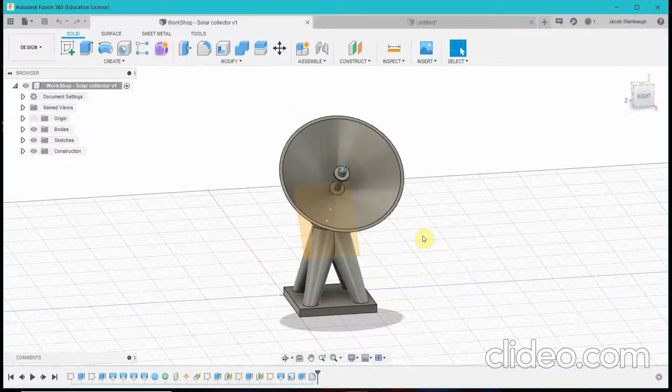Today I will be recreating the 3D solar collector that we made during GM3, as the second and final round of the workshops we held. Just to give you a preview, this is what the final product should look like—a little prototype solar collector that we'll be using for the autoclave project. Let's get started.

Once you open up Fusion 360, it should look like this, just a plain 2D dimension with no sketches. The first thing we want to build is the base of the solar collector, so we hit Sketch—you can click any plane, it doesn't really matter. I'm going to click this plane and then hit 2-point rectangle to begin.

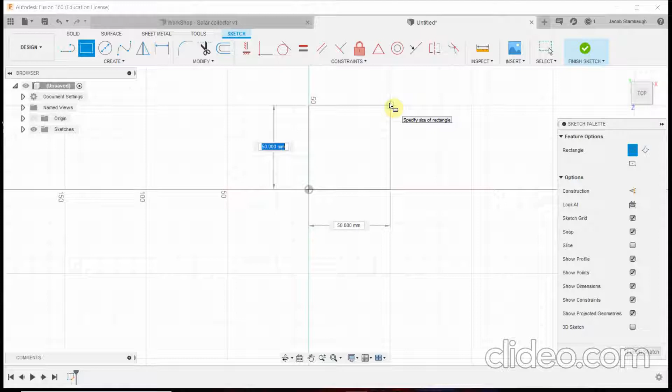You always want to start at the origin, since that's a fixed, locked place in these 2D dimensions. So the first rectangle is going to be here, and I'll draw my second point here to make more of a square than a rectangle. Once again, the exact dimensions don't matter, as long as you get something close to what I'm drawing—the actual numbers don't matter.

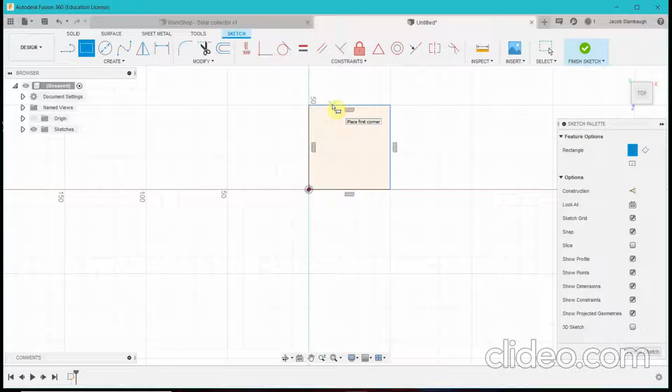One important thing to note is that after you draw the first rectangle, the tool is still selected. If you don't know this, trying to continue on can be annoying, because for the next step, if you want to click a line, it won't let you since it's still trying to draw more rectangles. To unselect the tool, you can always hit Escape, and now the tool is no longer selected.

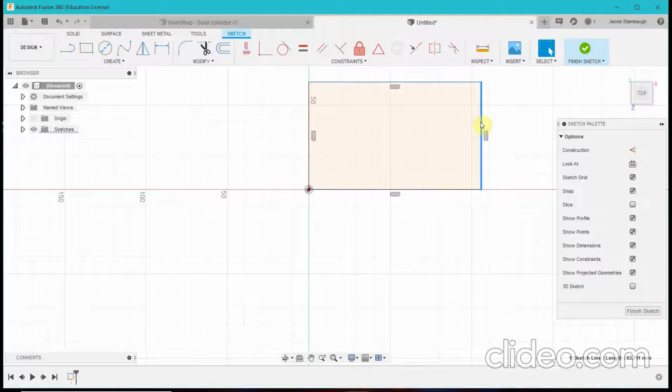Now we're going to fully define the sketch. Fully defining a sketch means that when you try to click and drag it from any end, it won't move. In this case, it's not fully defined because it moves. One easy way to tell if your sketch is fully defined is if it has blue or black lines—if I try to click and drag the black lines, they won't move.

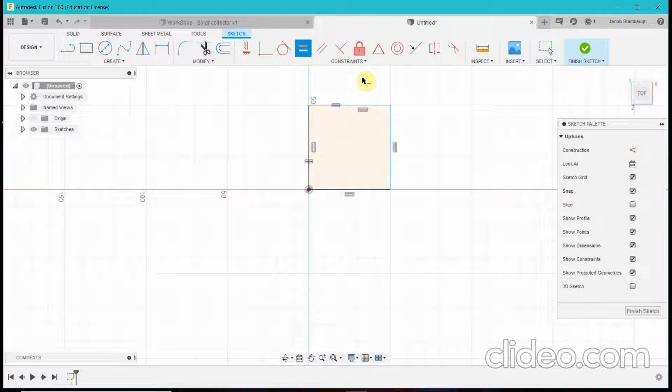Typically the easiest way to fully define sketches is either to set specific lengths to certain numbers, or to use constraints. For this case, we'll use a combination of both. First, we use this equal constraint to set these two sides of the square equal to each other, and you can see it automatically changed to make them equal. Once again, hit Escape to get rid of the equal tool.

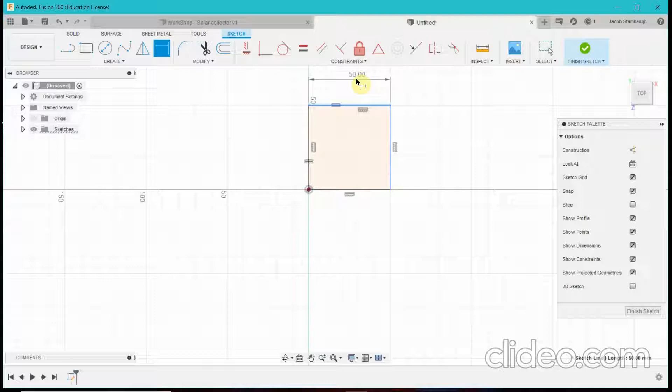Now, to fully define it, we right click one of the edges and hit Sketch Dimension—you can do this with any of the sides, and you can always use sketch dimensions for any kind of dimension, angle, or point from a line. I'll do the sketch dimension of one side, and it'll ask what I want to define it as—in this case 50, which is what we want this side to equal. Now you can see the lines turn black from blue, so when I try to stretch it out, it won't let me.

Our base is done, so we hit Finish Sketch, and now you should have just a square. We want to make this square 3D, and the best tool for this is not Press Pull. Press Pull is another tool you can use, but I try to stay away from it because it doesn't have as many features as Extrude—Press Pull only lets you create a basic 3D shape, while Extrude has a lot more tools and functions, so it's typically more useful to go with Extrude.

So you're going to extrude it some height. You can manually extrude it like I'm doing here, or you can type it in over here—in this case I want it to be not 50, but 5. My Fusion 360 has been set to millimeters; yours will probably be in inches. It doesn't really matter since we're just designing something, but as you can tell, millimeters would be really small, so this isn't very ideal.

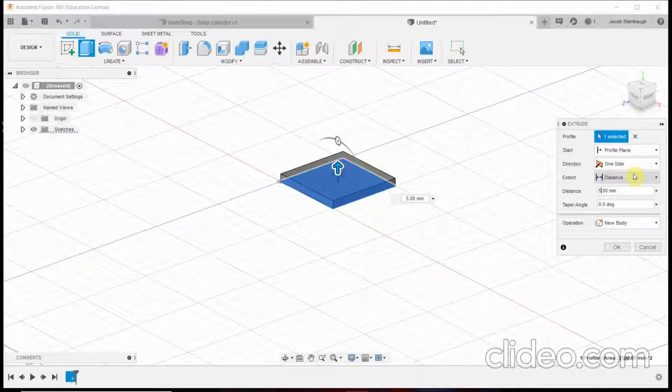Everything else looks fine—we want to start at the profile where we clicked, we only want to go one side, we want to manually set the extrude distance, and we want a new body. So we hit OK, and now you can see we have our base here.

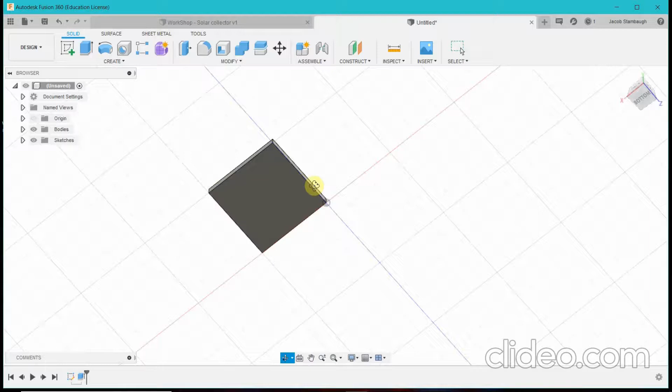If you're wondering how I'm panning around this object, I'd suggest using a mouse whenever you're CADing, it just makes things a lot simpler. If you scroll the pinwheel, it zooms in and out. If you press the pinwheel down, it allows you to drag around. And if you hit shift and the pinwheel, it allows you to pan around like this, so you can see any face or side you want.

If you don't have a mouse and still want to do these things, you can always left click this square and rotate it around. I typically use this to orient myself because it has these useful arrows and stuff like that. But moving forward, another really useful tool is clicking these little folders here.

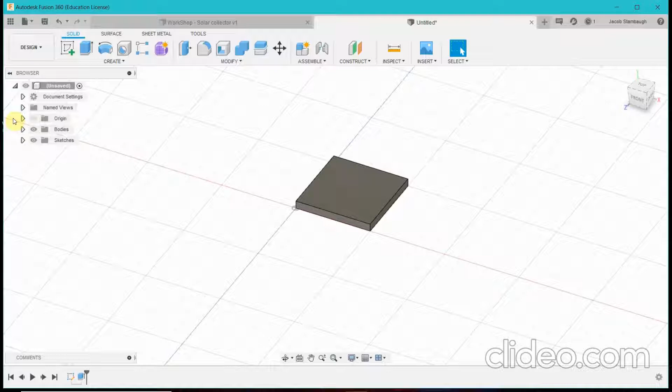You can hide, like this—in this case the sketch we previously did was already hidden—but you can choose to hide and unhide certain things that you've drawn or created thus far.

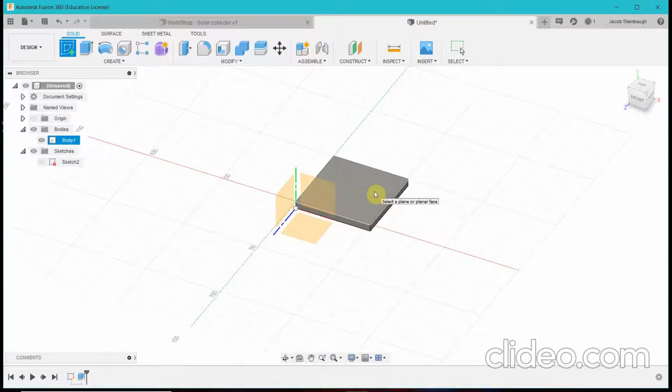The next part we're going to do is creating the legs of the solar collector. To do that, we're going to create a sketch onto the top surface of our base. While it may not be evident why I'm doing things in this order, it'll make sense later. The very first thing we want to do is draw a circle right in the middle of this square.

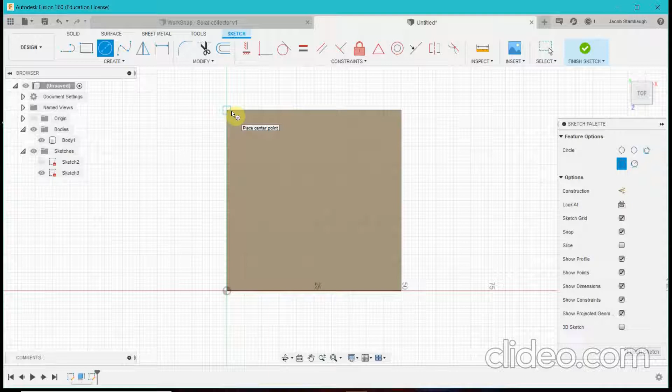To do that, you can drag your cursor around the edges, and a lot of the time Fusion 360 tells you where you're at, so you don't have to zoom in closely to see if you're on the line or not. A little X appears when you're attaching to another sketch, a square appears when you're attaching to an edge, like a 90-degree edge, and for the midpoint of a line, a little triangle appears.

In this case, we want the midpoint, which if you drag your cursor should appear as the triangle. If you keep following that dashed line, it should get you to these two dashed lines, which is the middle point of this square. So we want to draw a 20 millimeter circle.

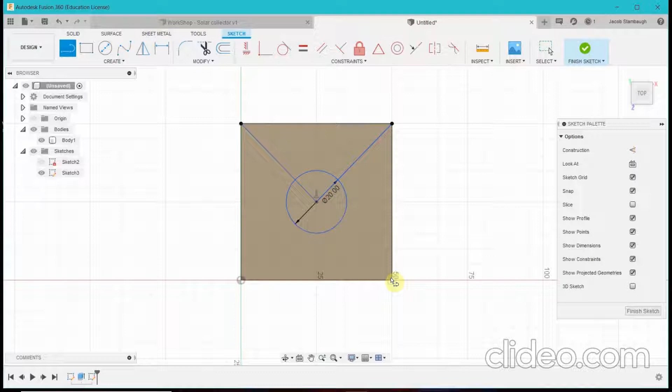Then we are going to draw some lines from the corners—actually, instead of drawing horizontally, we are going to draw them from the edge to the center like this, and repeat for all four sides. The reason we do this is because it fully defines the inner circle, since these all have to be a certain distance from the center point.

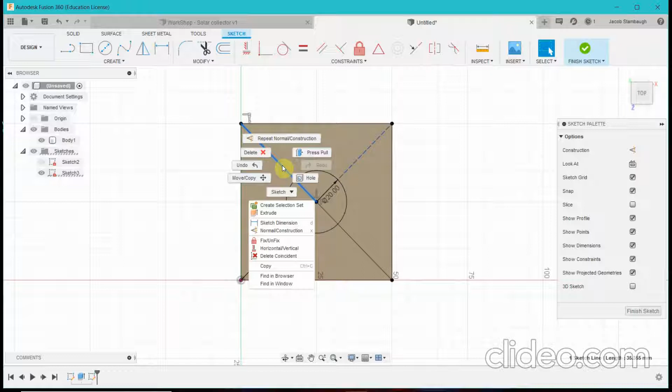However, when you hover over these lines, you can see it created a bunch of weird geometries—we don't want this weird, almost trapezoid thing. So what we're going to do is right click these lines we created and make them construction lines. To do that, you right click and hit normal construction.

If you want to do all of them at once, you can control click multiple things and then hit normal construction. So rather than just drawing the lines horizontal, it still fully defines the circle, but now when I hover over, it gives them the whole area of the square and the circle rather than that weird trapezoid we were getting earlier.

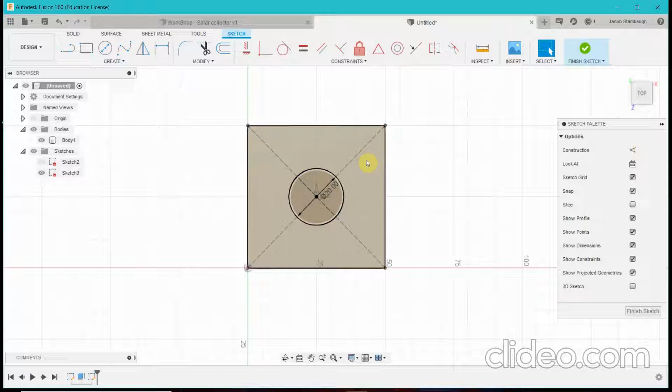So these construction lines allow us to create special geometries without really having to worry about creating other weird shapes that we may or may not want. It's a pretty useful tool for sketching, highly recommend using it.

Moving forward, we're going to add the 4 legs of our solar collector. To do that, you're going to draw 4 circles—we don't care where you put them on the line right now, we'll fix that—but we do care about the diameter, so we'll make them 10 millimeters.

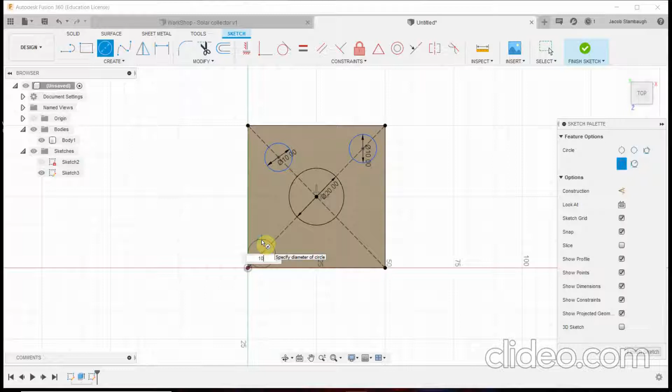Again, it doesn't matter where you put it, just put 4 circles anywhere on these lines, but make sure they're attached to the line itself. To check that, you just have to see that little X hash mark.

Now, obviously we don't want these legs to be asymmetrical, since it won't be very structurally sound. So what we're going to do is click the center of the circle, control-click the edge of the square to select multiple things at once, then right click and hit sketch dimension.

Now we're going to define the length of this sketch. One important thing to notice is that where the sketch is right now, it's doing the distance from a diagonal kind of line, exactly from the edge to the center of that circle.

But if I move my mouse over here, you can see it shifts. The difference is that this length, 11.155, is the distance on the y-axis from the point, while 15.775 is the diagonal distance between the two. You can do either, but make sure you're consistent for all 4 circles so it's symmetrical.

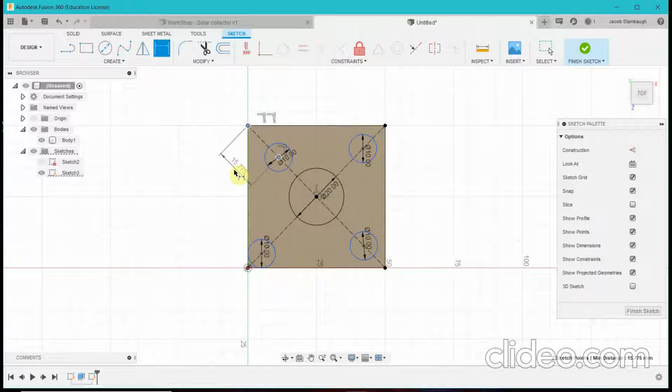In this case, I'm going to use the diagonal and make it 10 millimeters away. You can see it automatically does that for us. Now that the sketch dimension tool is already selected, you can just click 2 things and it'll automatically do it for you.

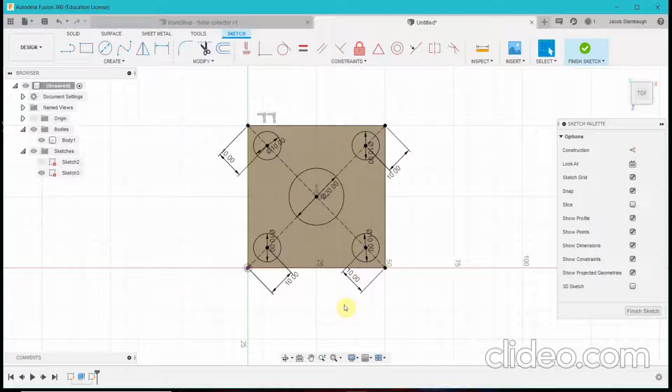We're going to repeat this again for all 4 legs. So now all the legs are pretty symmetrical to each other, as you can see they're all 10 millimeters away from the edge. This looks fine, so we're going to hit finish sketch.

Now we are going to create this kind of slanted rising shape, because if you were just to do a normal extrude here, you couldn't really get that angle even if you tried.

I actually never used taper angles, let's see what this does. A taper angle just does columns basically, but you can see we can't really get this diagonal kind of extrusion just by doing a normal extrusion.

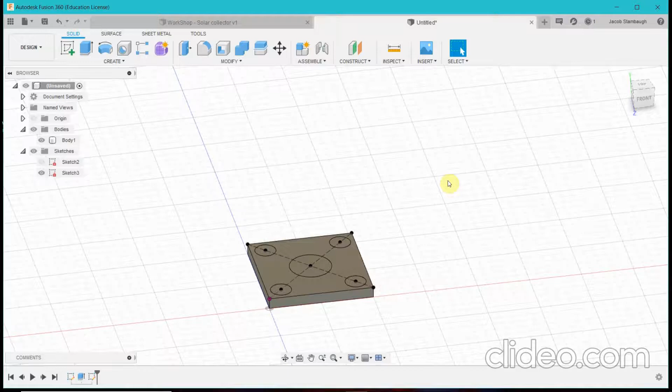So to make these special kind of legs, we're going to do it in a 2-step process. The first part is to extrude this base so it gives us a reference point for where to extrude these legs to, which is also why it was so important to do this very symmetrically.

If we just try to normally extrude, it'll do it from here. While you could do it like this and cut away the bottom part later, a very easy way to do what we're trying to do is to not start the extrude from the profile plane, but to offset the plane instead.

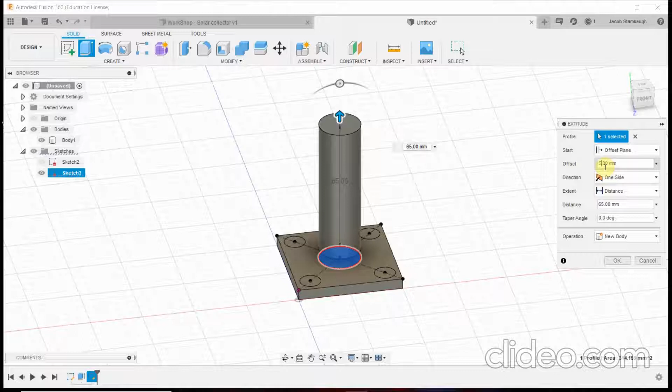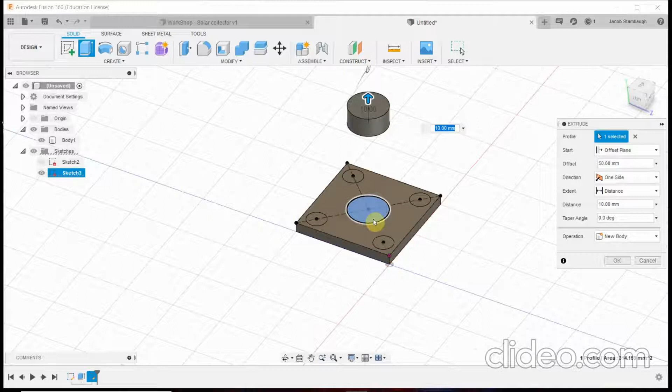What this does is, if I type a number, it'll be very apparent. Let me move this so you can see it better. Actually, let me extrude this by quite a bit. So what offset does, as you can see, is start extruding from some distance away from the plane we selected. In this case, the plane we selected was the top face of the base, and we offset it by 50 millimeters, which gives us this distance.

So you want to offset it by some distance, preferably a little bit higher than usual. And we're only going to extrude it a small amount, we don't even have to do 10 millimeters because this is just almost like a reference geometry. So we'll do just 1 millimeter, and once again we want a new body.

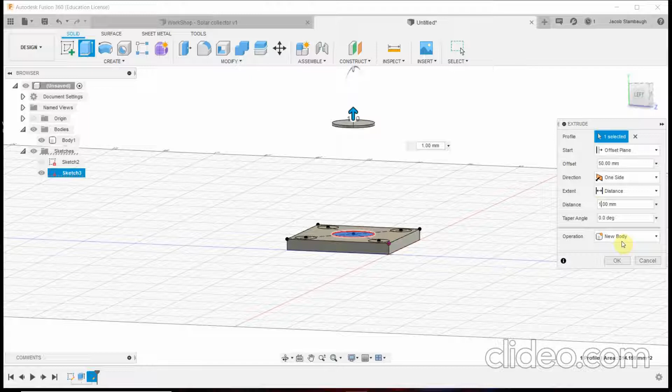So now we have, we should be naming these to keep track. We have our base, and we'll call this our upper base. This upper base isn't too important, as you'll see right now.

When we extruded, one thing Fusion 360 usually does is hide the sketches after you're done with it. But in this case, we're not actually done with the sketch, we still have quite a bit more to do, so we're going to make it visible again.

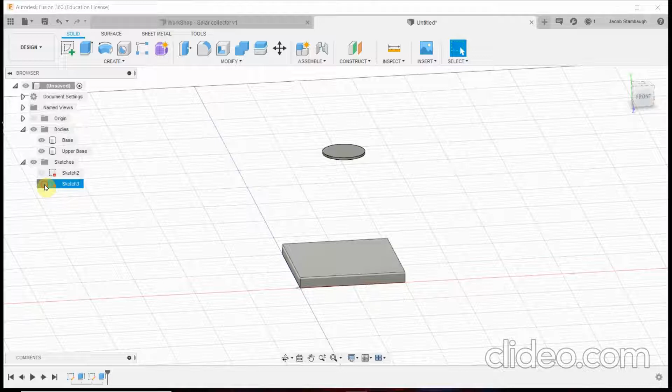And so now we're going to almost extrude, but the feature is called Loft. And so what Loft does, let me see if it has a good definition here. It says the Loft creates traditional, okay, that's not a really good definition, but basically what Lofting does, it allows you to create some pretty cool extrusions. Like let's say you wanted to connect, in this case, well, let me look at it, but if you wanted to connect that square to a circle. You couldn't normally do that, but the Loft feature will automatically calculate the best kind of shape to do that.

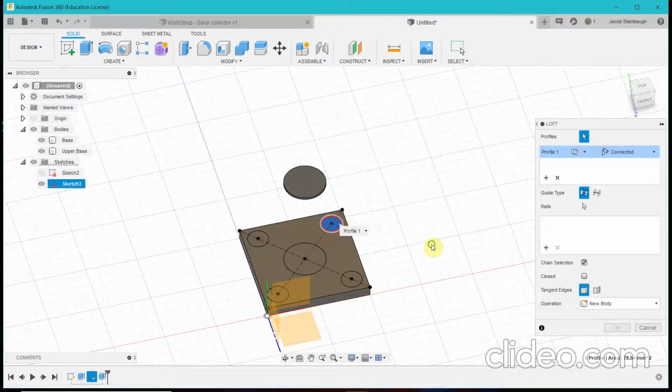And the Loft also will, as we'll see right now, you can choose this face and this face, and it'll automatically create the best shape to connect these two. So you typically use Loft when you're connecting kind of weird geometries. And so when I click Loft, it's going to ask us for what profiles we want to loft. And in this case, we want to loft this circle, and we also want to loft this. And so you can see it automatically creates this shape for us. And that's going to be the best geometry possible.

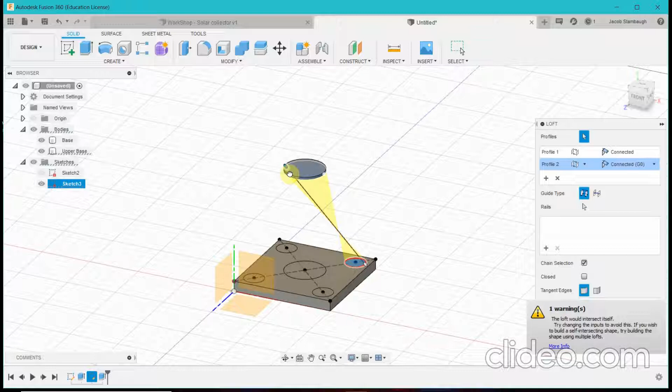And if you don't think it's the best geometry possible, which is highly doubtful that CAD messed it up, you can also choose this. You can rotate the tangent line of where it's going to go. In this case, it creates this non-manifold geometry when you move it completely opposite, but you can kind of rotate it if you want to make some interesting geometries. In this case, we'll just leave it normal.

And if you're having issues lofting, typically what happens is it'll automatically go to Rails. And what Rails does is it kind of helps the Loft figure out which geometry you want to go to. So one thing I could have done was draw some kind of line from here to this shape, and then tell the Loft, oh, follow this line when you create this geometry. But in this case, I didn't do that because that would have been a little complicated. So make sure you don't accidentally click some rails, and if you do, just select it and hit the X.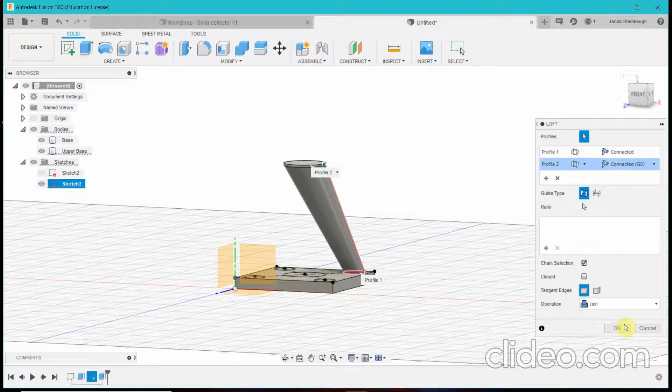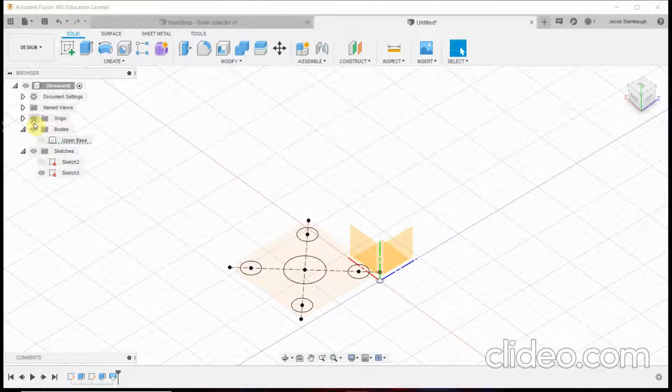In this case, we only want 2 planes. And also in this case, it'll be okay to join. Typically you don't want to, but we'll see why later on this is important. So for now, we'll hit OK. And so now we're going to repeat the same lofting process for all the circles. But as you can already see, it's going to be hard to click this underface because this is in the way. So we're just going to hide it for now. And while it looks kind of weird because they combined the bodies right now, just make sure you're going in some kind of order so you're not relofting the same thing. In this case, I started on the upper left, and I'm just going to go clockwise.

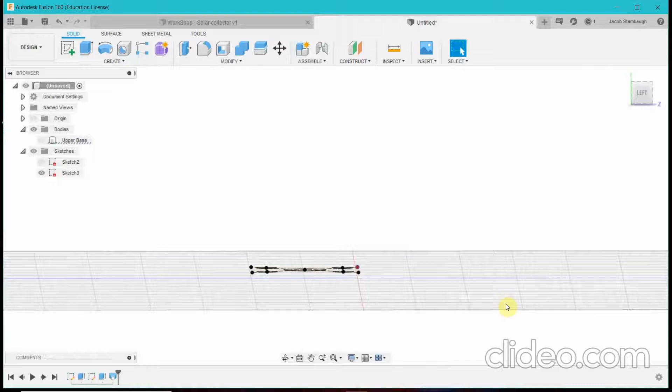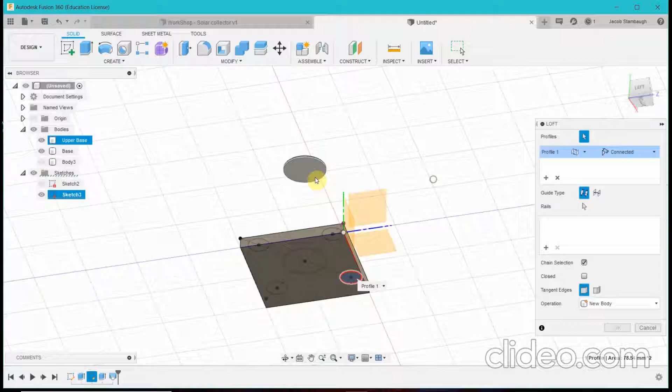So to do that, once again, I'm going to go to Create, Loft. We're going to select this, and then, actually I realized this is my mistake, sorry. We are going to go over here, click Edit Feature, and we're actually not going to join them yet. We're just going to do New Body. This will make it easier when we're doing all of them, because now we can hide just the leg and have this still available. I apologize for that. So we're going to hit Loft. Once again, click that circle, click that, New Body, and we hit OK. Now we have 2 legs. As you can see, the geometries are contacting each other. And for this case, it's okay.

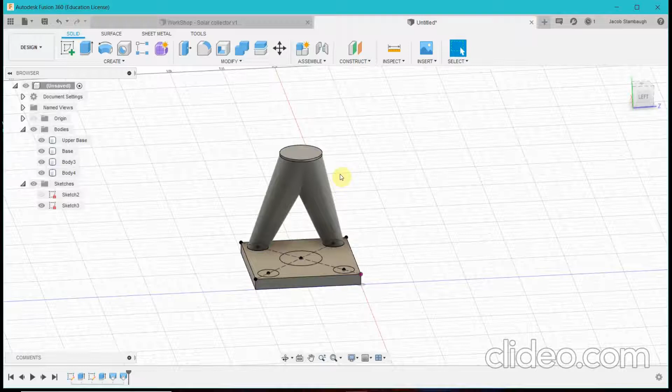Hi everyone, sorry, I apologize. There was a little issue with the recording software, but where I left off was we had just relofted a second leg. And I was explaining how, as you can see, when you highlight the 2 bodies, there's a little bit of contact overlay over them. For now it's okay, it's not ideal, but Fusion 360 recognizes that it's okay. It's not creating any weird black holes or anything, so it'll allow it.

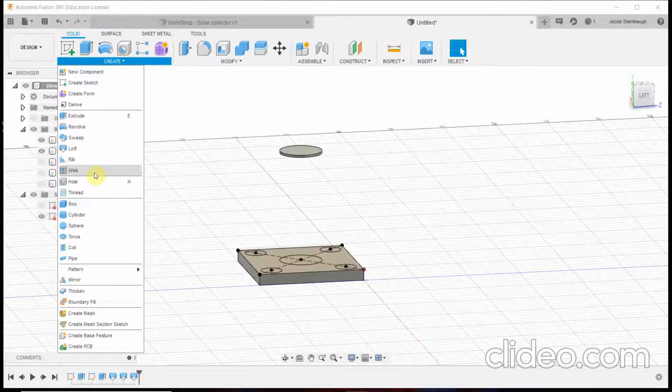But moving on, we're going to continue to loft the other 2 legs to create the overall base. To do that, we're going to hide these 2 again. We're going to go over to Loft, click the 2 faces that we want. We don't want to join, so we do New Body, hide that, go to Loft again. And in this case, since this is the last leg, we can actually do Join. And the nice thing about Join is it'll automatically join all bodies that are in contact with it.

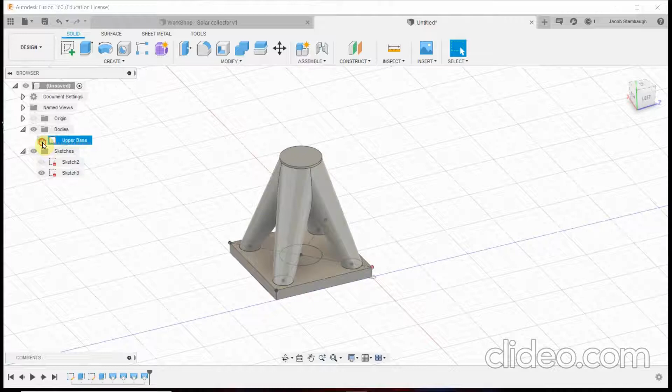So this is your last leg. It should look something like this. And then if we hit OK, you can see it went from like 5 different bodies to just 1. So now that we have our base complete, we are going to move on to start creating the dish itself and the pole that runs through it.

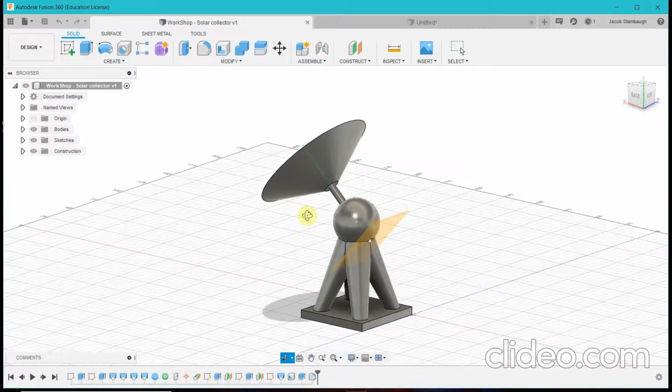And so to do that, the first thing we want to do is add, and just a disclaimer, this solar collector is just based on a picture I saw. It is completely, I guess, fictional. It's a very prototype that I just came up with in my mind and designed from scratch. So this may or may not be very mechanically accurate.

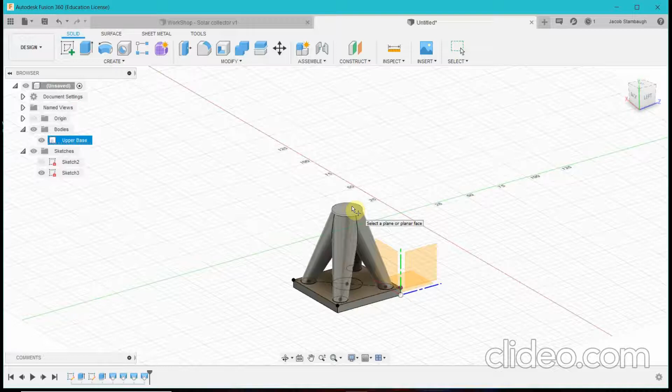But I decided to add a sphere, which you can do by going to create and you drop down to sphere, and this just allows you to create a sphere anywhere you want on a plane, of course. And so the plane I'm going to select is the upper base, and we want to do it right in the center, which can be seen by that circle. And so then we don't want to cut. This cutting will just create a hole.

We actually want to, in this case, we could do a new body. And so you can drag it to as much as you want, or as little. In this case, actually we can do join just to make this easier, I think. Yeah. And so we can do something like this, maybe? Let's see. Again, this is just kind of what I thought looked right. So that looks right. 23 millimeters.

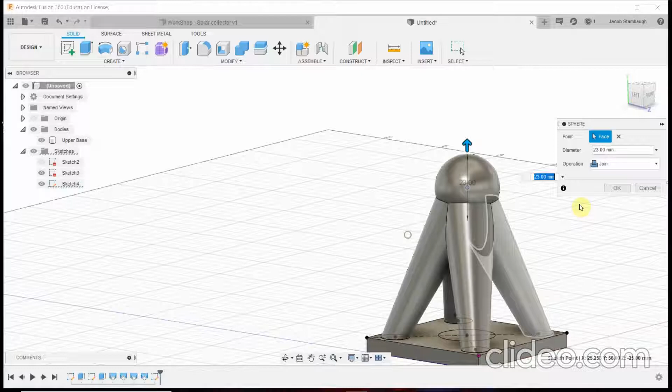So we hit OK. And so a really important design and overall CADing feature that's pretty useful to use is to create these other planes. As you can see here, I used this plane to sketch out and create everything else. So I can create these angles easily, basically, is what the function of this plane was.

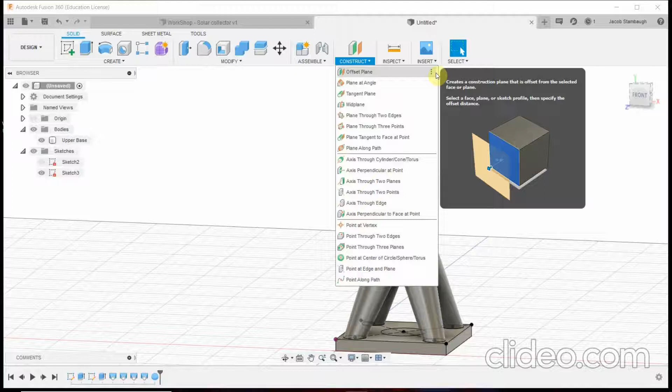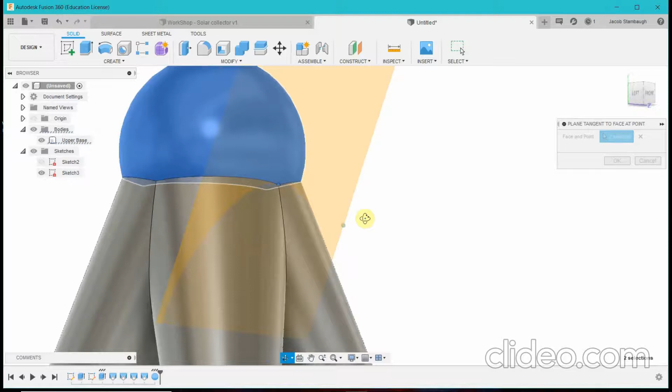And so to do planes, there's a bunch of different ways. In this case, there's a lot of them. We are going to use a plane tangent to a face at a point. And so the face that we want it to be tangent to is the sphere, and the point is going to be this vertex of the sphere and the legs. So you can see that's the plane that we're going to use.

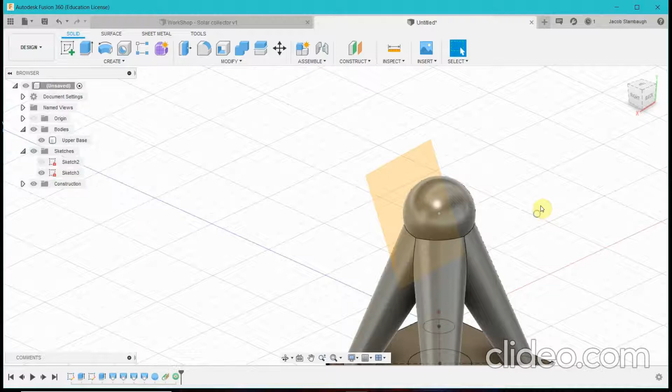And so now we have this plane, and what we're also going to add is a point at the center of a circle, which can be found by going to construct, and it should be down here. And we're just going to add a center point to this sphere so we can have a bit of a reference when we're drawing stuff. And so now we're going to create the pole that holds the dish to the base. And to do that, we're going to sketch onto the plane that we just created.

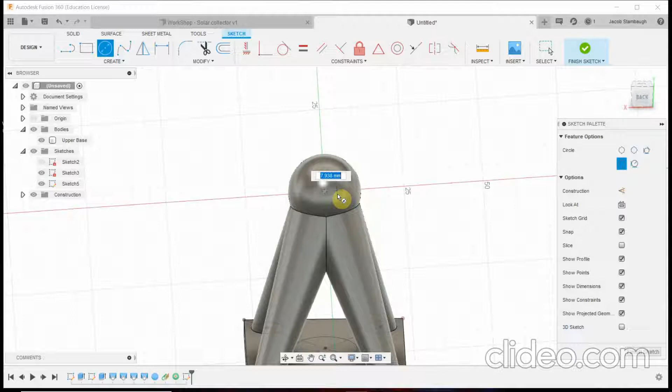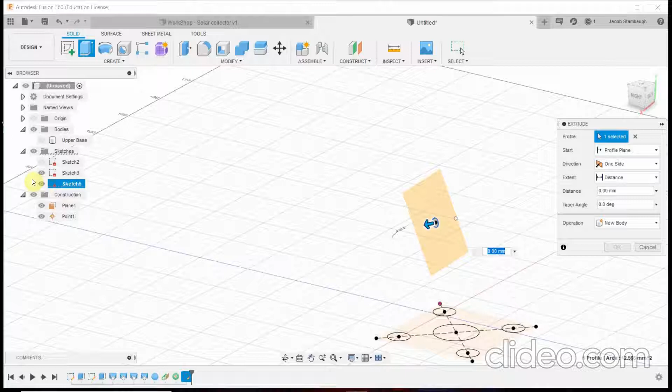And we're going to click center diameter circle, and click that center point that we just created as the first point. And you want to drag it out some distance. I kind of want a smaller rod, so we'll do 4 millimeters. And if you want to see what you're drawing on, it typically helps, so we'll hide what we're doing for now. And so this is all we really need for now. And so now we're going to make that a 3D geometry by hitting extrude. And if you want to see what you're doing, you can unhide what we just did.

And so in this case, we're going in the negative direction. For whatever reason, that's how Fusion 360 defined it. And so you just want to go to some negative direction now. In this case, we'll go 70. We'll go back and edit this stuff, but for now, 70 is fine. And as you can see, it created, starting from this plane onward, that rod.

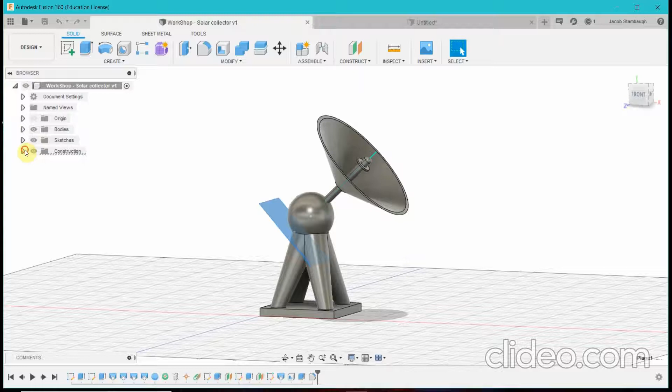And so, to make the next part easy, there's 2 ways you could do it. You can either draw more circles onto this plane and then offset them, or you can actually just offset the plane and then draw directly onto the plane at different areas. I typically would suggest offsetting the plane. In this case, if I go to construction, I use 3 different planes to create everything. It's a lot easier than figuring out how much you want to offset it from the original plane.

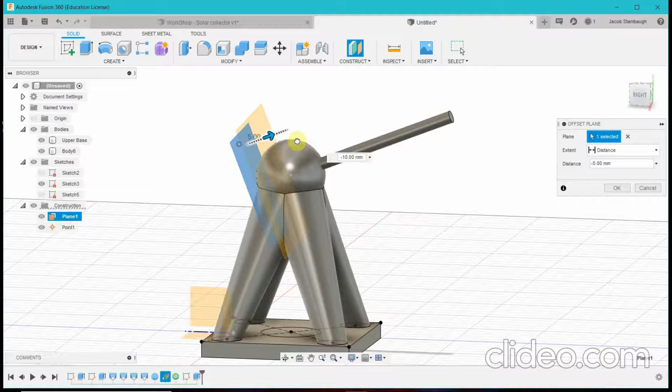And so once again, we're going to go to construct, and we can hit offset plane, which allows us to move this plane to different areas so we can draw on it. And we can always go back and change it, which I will show later, but you want to offset it some distance, let's say about here from the sphere. So we hit OK.

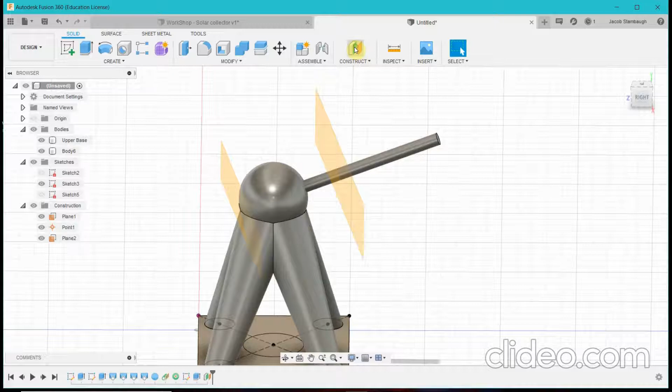And now we have 2 planes. And we're going to offset it again. And we're just going to do this one a little bit. Actually, we can do this one a little bit wider. We can do it 15. And so now we have these 3 planes.

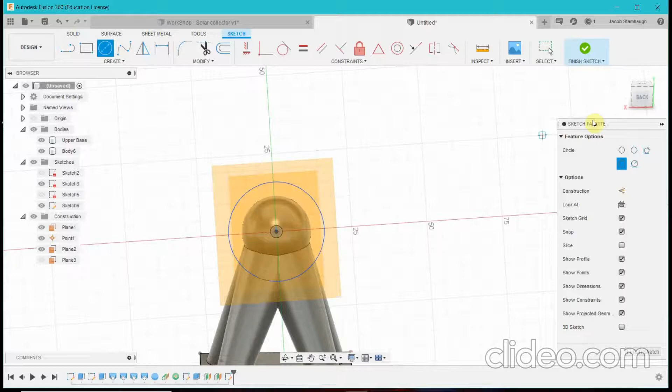And so the first thing we want to do is we're going to sketch onto the furthest plane. And once again, we're just going to draw some circle. We want this one to be kind of big, so just draw a little bit bigger circle. And then we're going to hit finish sketch. And now we have some circle along this axis. It hid the plane as it usually does. So if you need the plane to see where you're at, you can have that. In this case, I will hide it, and I will actually hide that sketch that we just did.

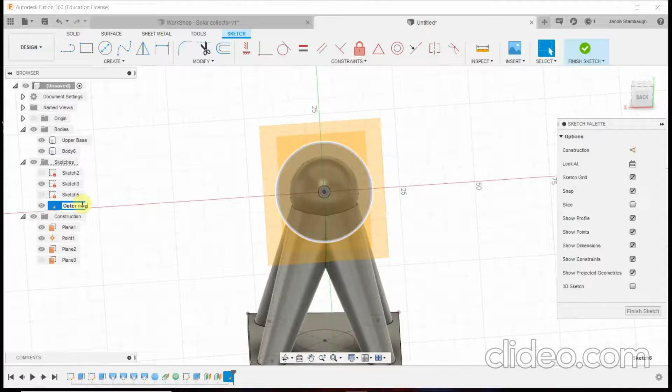You can also relabel the sketches if you want. Oh yeah, you can. So in this case, we'll call this outer ring, just so we don't get confused later on. And so now we want to draw a sketch onto the inner ring. To do that, you hit sketch, click the plane you want to draw on, and we're going to draw a 2-point circle. And we actually want it to be the same size as our pole. It's kind of hard to see this really small circle from out here, so we zoom in and we see that this box tells us that it's the same size. And so once you're done with that, we can hit finish.

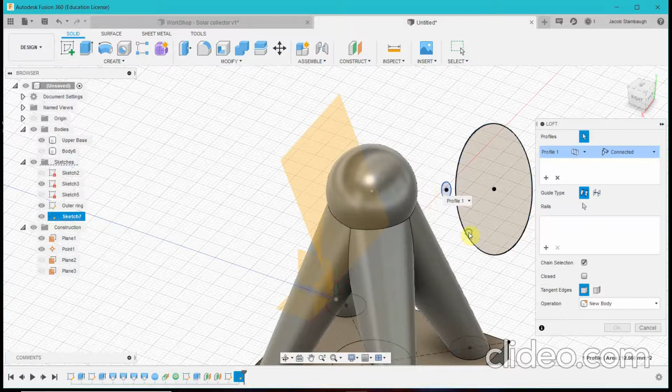And similar to before, we're going to hide this so it's easier for us to do what we're going to do right now. But once again, we're going to connect these two using the Loft feature. We're going to select the 2 faces that we want to loft, and it should automatically create this kind of cone for us here. And so we're going to hit OK, and if we unhide this body, it shows what it looks like. But as you can see, this is not hollow.

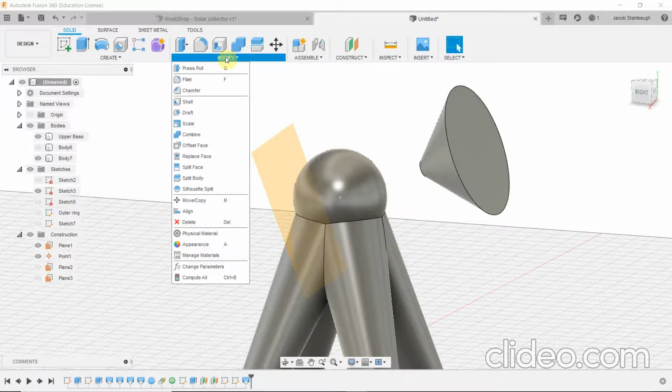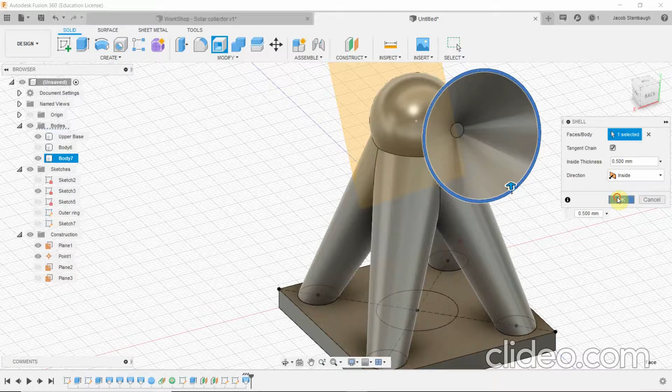And so to make it hollow, we're going to go to the modify feature, and we're going to use shell. And shell does exactly what it sounds like. It creates a hollow inside using some 3D fill geometry. So in this case, we want to shell this, and the thickness basically tells you how thick this outer ring is. So we actually want it to be really, really thin, so we're going to do 0.5. As you can see, it automatically creates this really nice shell for us. So if we unhide it, we can see that we're getting to where we want it to be.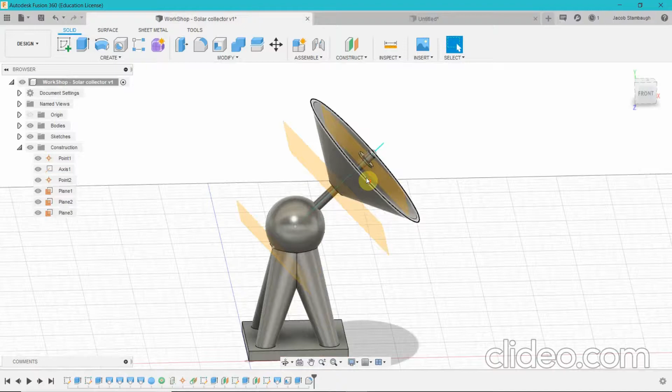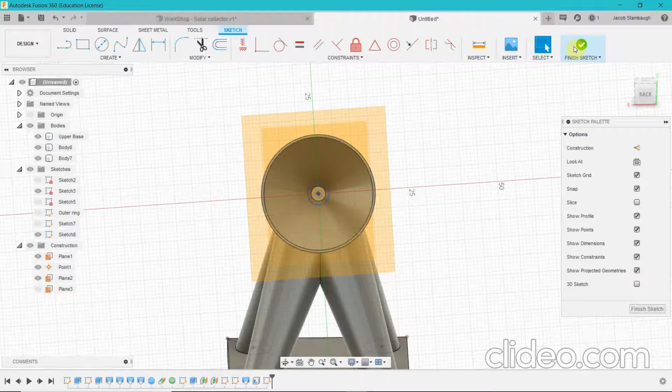Let's see, where are my planes? So I also added a little circle onto this, so if we wanted to attach some stuff to the end, we have some base to attach it to. And so to add that, we're going back to add sketch. I'm going to click the plane that we wanted to add it to. We're going to click circle. We want the center of the circle to be at the center. And we want it to be a little bit bigger than the pipe, but not bigger than the entire object. So we'll just go with 6. And we hit escape to get rid of the drawing tool. And then we hit finish sketch.

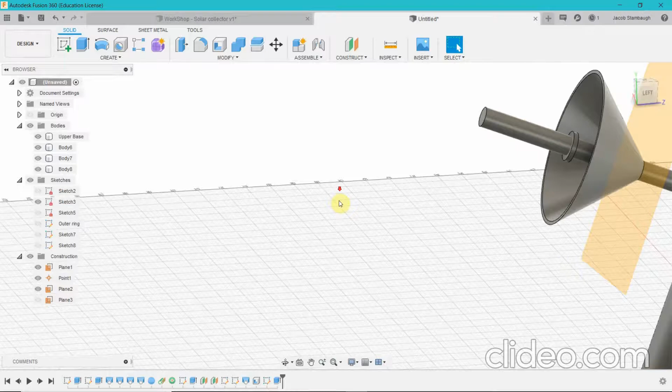And now, to make that 3D, we're going to hit extrude, click the geometry we want, and we don't want to cut because that'll just make a giant hole there. So instead we want new body, and we don't want it to be very thick, so we'll just do 1 millimeter. As you can see, it automatically creates that little thing for us. And so one other thing we want to do is we want to give this a ball at the end, or I guess a sphere. And I don't think it'll work with Fillet.

Okay, yeah, it doesn't work with, I'll explain what Fillet does right now. It's actually a really nice tool too, but to do that ball, we're just going to do sphere again. Make sure you click the face that you want, and then the center, and it should, see, it's wanting to cut it. I don't know why it would want to cut it, it makes absolutely no sense, but in this case we want to join, and so we'll just give it some distance like that. And so it creates this nice little end cap for us basically.

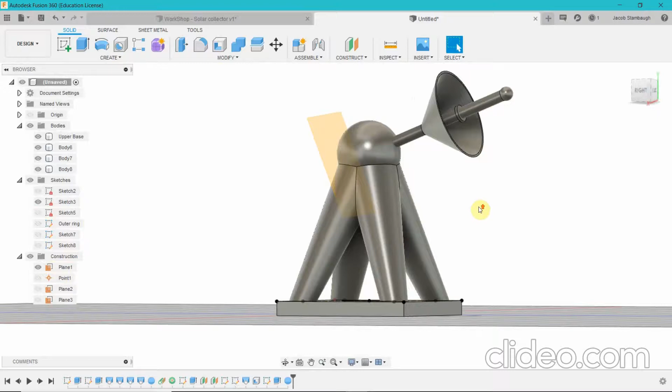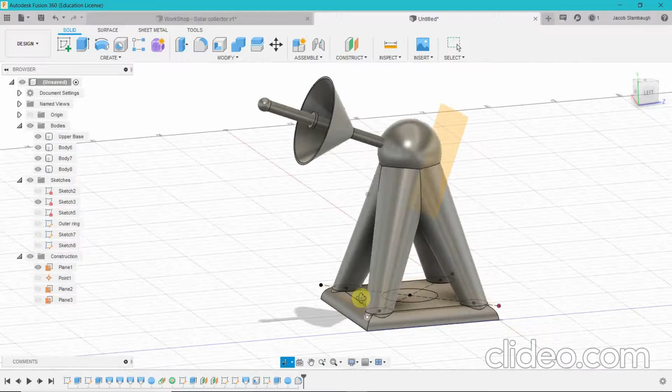And so as I was saying, the Fillet tool over here is a really nice tool that gives you smooth, round edges. So in this case, if we don't want all these rough edges around this thing, you can just go around and select them all. And what it does is, you can actually just pull it to see, but it creates a nice rounded edge for us. So this is pretty good for prototyping, for safety concerns, if you don't want to hurt the patient or whatever. So it automatically gives us that nice edge.

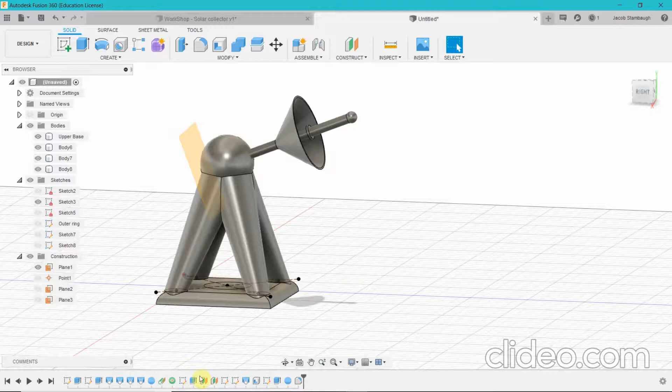And so obviously this doesn't really look much like the one I created earlier. And so an important tool that we can go back to use is the timeline tool, like I had mentioned. What this does is it allows us to go back and edit features, and then when we roll back, it'll automatically do everything that we've done already once again. So let's say I want to change the length of this pipe. If I click it, I can see where I did this feature. And if I roll this all the way back, you can see it deletes everything else that I've done, but don't worry, you can always come back to it.

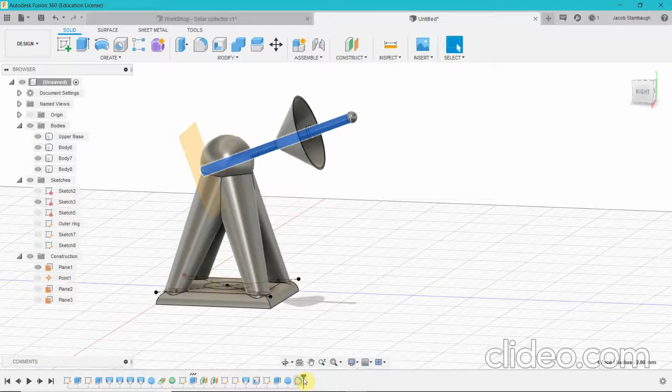And so we're going to edit the feature that we did. Let's say we don't want it to be this long. We actually want it to be, let's say 55. We can change it, and then when we roll back, it'll automatically add everything else we did for us. Let's say we want to give this a little bit more of an angle. To get more angle, it actually has to do with this tangent plane, which is in reference to the ball on the corner edge. So if we click this, we can see it was made over here.

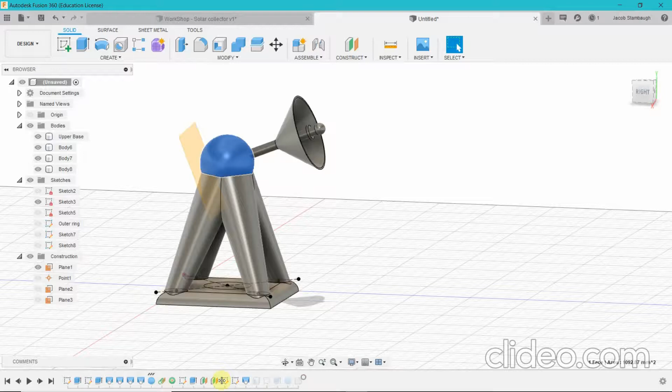So once again, we roll back to where we made it. We click edit feature. And so if we make the ball, I believe, bigger, it'll give us more of an angle to make that point and this ball tangent to each other. So if we roll all the way back, you can see that it made the ball a little bit bigger than I would have wanted, but it's also interesting.

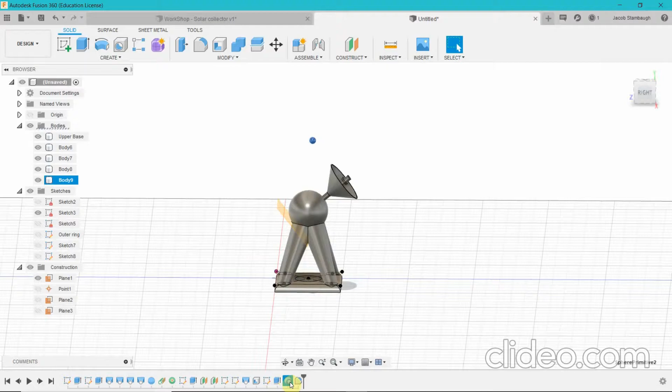Why did that not? I don't know why this is not attached to that. I thought I hit join body. Yeah, it is joined. Maybe new body. I'm actually not sure why. I'm pretty sure the sphere is untouched because it wasn't fully defined. So in this case, we'll just delete it. It's kind of strange though, but you can see that's what happens when you don't fully define features like that. It'll end up in weird places when you go back and edit the timeline. So that's why it's really important to fully define features.

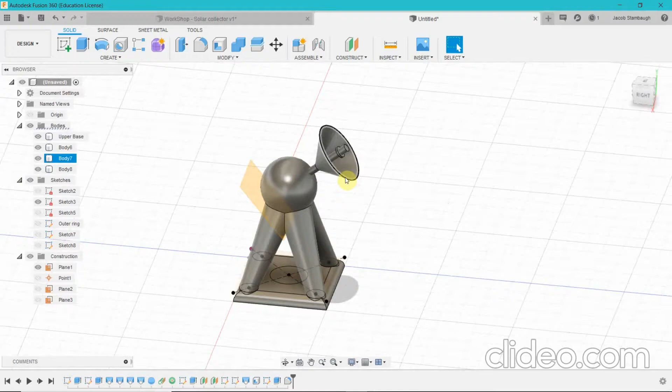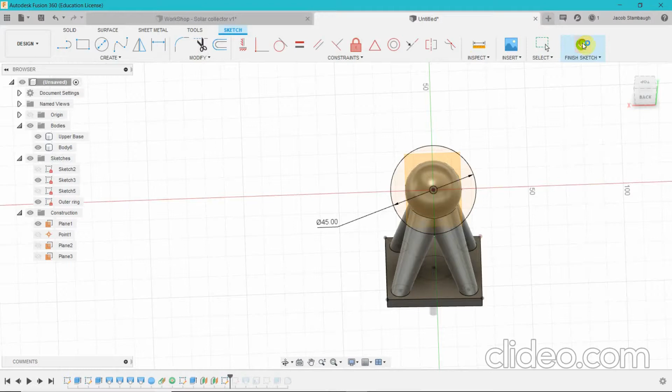So your entire base is always connected, or all the parts are connected to each other. And vice versa, if I wanted to change the shape of the cone, which is from the sketch, I can go back to where we did it, right click, hit edit sketch. And an easy way to do it, which I should have done earlier, was to define it with sketch dimension. If I make this bigger and just hit OK, I can roll back the timeline and it creates this bigger cone for us.

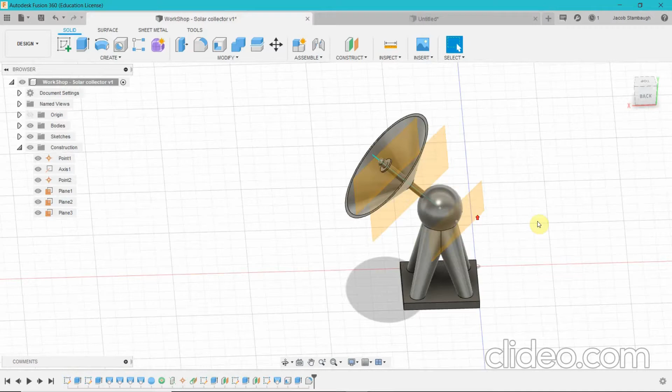Another important thing is when you do the sketch dimensions, it allows you to go back and easily edit the features you did. And so this is pretty much looking like what we did earlier, just different size dimensions and stuff like that. I also added an axis just to see where everything was, but that wasn't completely necessary. But this pretty much completes this tutorial of the solar collector and how to use the different features of Fusion 360.